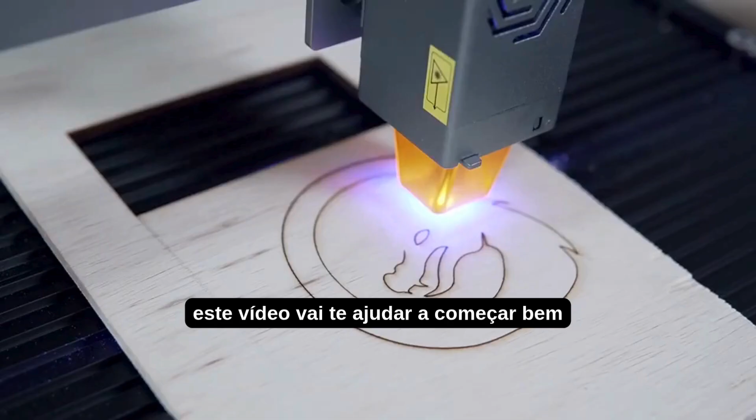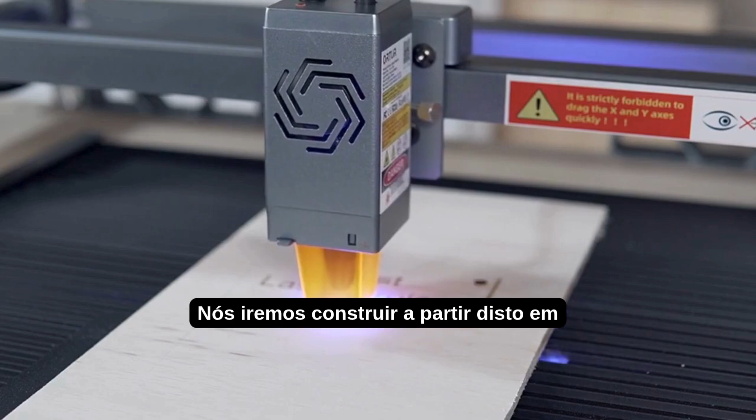For those starting out on their laser journey, this video will get you off on the right foot by giving you a high-level overview of LightBurn and the tools available to you. From setting up your USB-connected laser, using a few common tools, and finally cutting out a keychain as your first project. We will be building off of this in future videos, and will also have links in the description for more info.

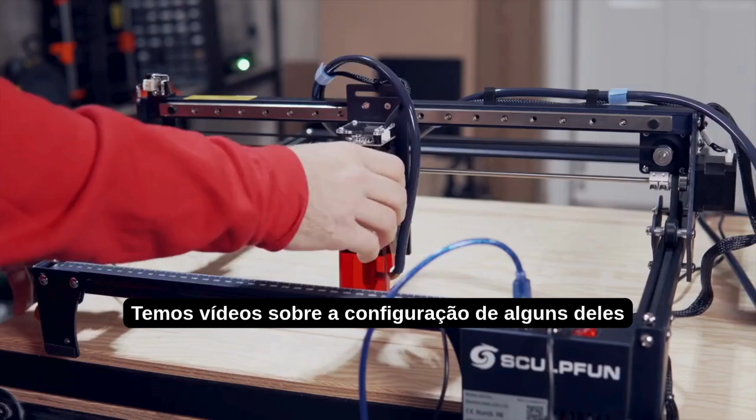The first time you open LightBurn, you will need to create a profile for your laser. Ensure that your laser is powered on and plugged into your computer over USB. Choose Find My Laser. This will scan for your connected machine and import settings from the laser. Many lasers will require a driver, so if your laser is not detected, you may need to get that from the manufacturer.

We have videos on the setup of some of these lasers in our playlist linked below. Enter a name for your laser, and if your machine has limit switches, enable Auto Home Laser on startup. Click Finish to finalize device creation, and OK to close out of the device window. In the laser window on the right side, we can see our laser status shows connected and the laser is ready.

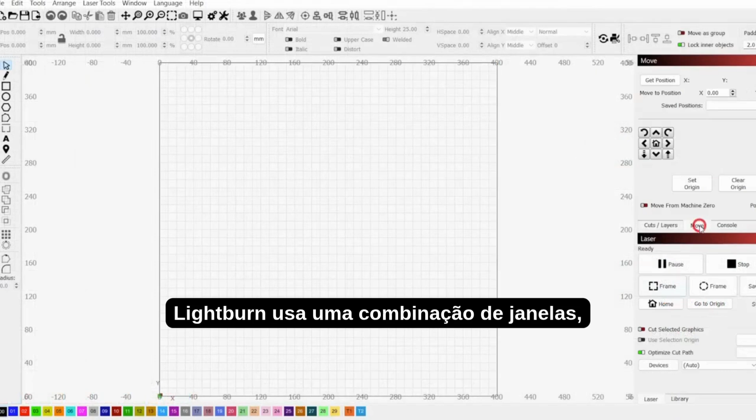LightBurn uses a combination of windows, tabs, and toolbars for its various tools and functions. Many of these can easily be moved or reordered to what works best for you. If something goes missing or you don't like a change you made, open the window menu and click Reset to Default Layout, and that will put everything back in its original place.

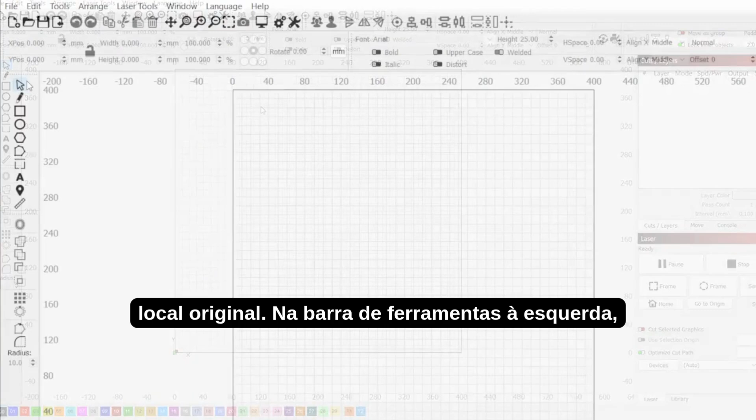In the left toolbar, we have a few tools that can be used to create shapes. For our keychain, select the rectangle tool, then click in your workspace and drag to create your first shape. With our rectangle placed, click the Escape key on your keyboard once to switch to the selection tool.

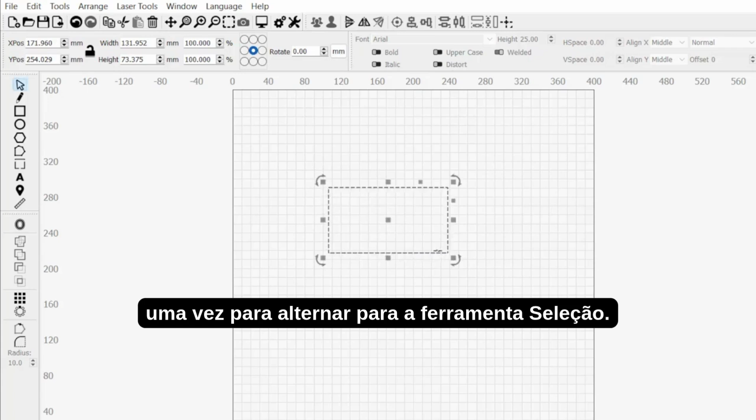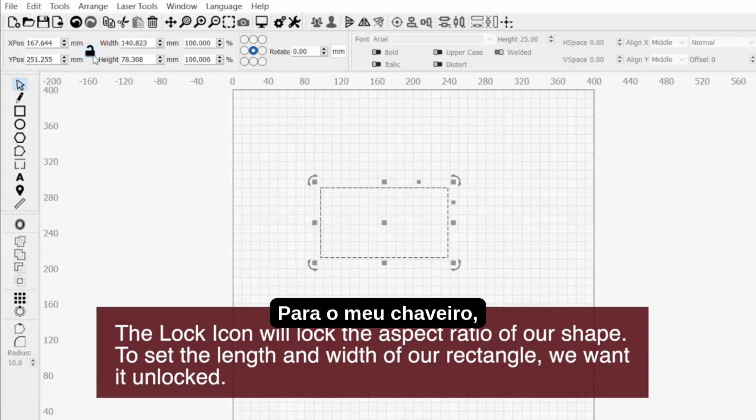With this, we can click and drag the handles around our shape to resize it, or click and drag the center handle to move the shape in our workspace. The width and height text box in the top toolbar will show the shape's current size, and you can set specific values from there as well. For my keychain, I went with a width of 100mm and a height of 50mm.

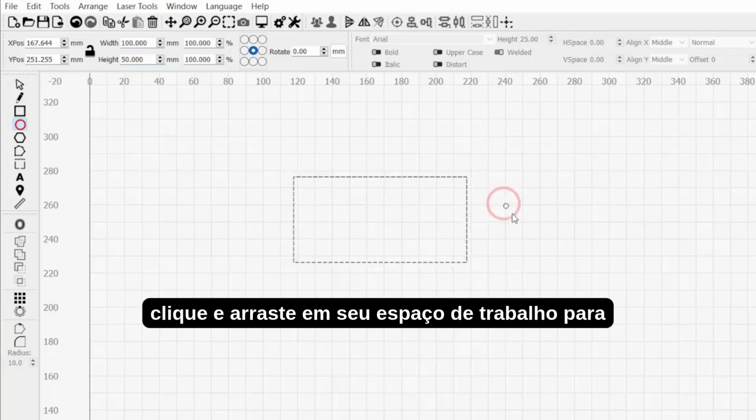Our keychain needs a hole for the keyring. For this, select the ellipse tool beneath the rectangle tool. While holding down the shift key, click and drag in your workspace to create a circle. Holding the shift key will ensure it is a perfect circle.

Just like with the rectangle, we can use the handles to resize our circle. 5mm in size should be plenty for most keyrings. Drag the circle to any of the corners of the rectangle, leaving a gap roughly the size of your circle from the edge.

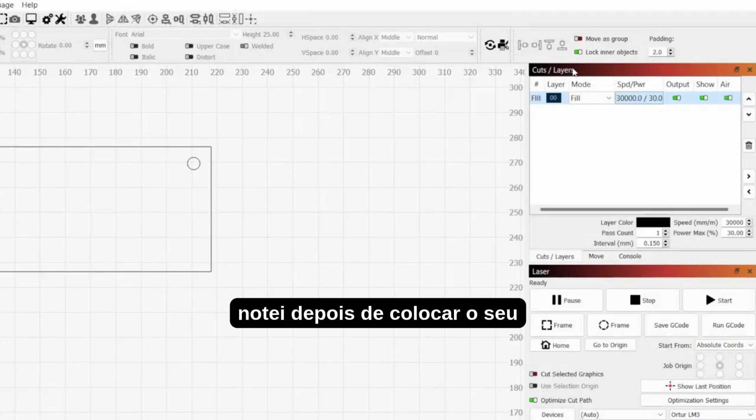You may have noticed after placing your rectangle that a layer appeared in the Cuts and Layers window. Any design created or placed in your workspace will have a color layer assigned to it that tells LightBurn what you would like done with that layer.

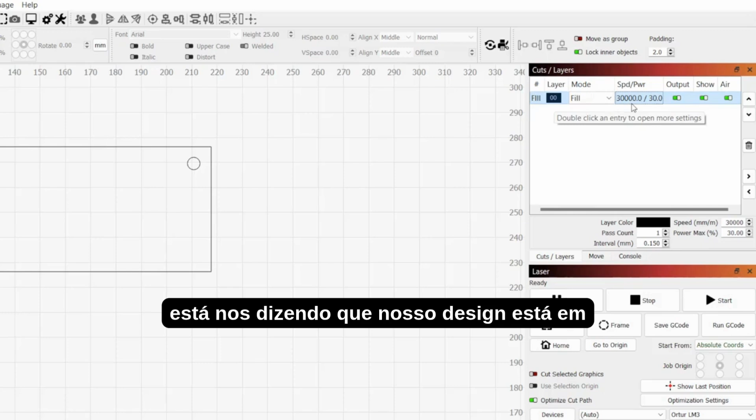Currently, it is telling us that our design is on the black color layer in fill mode with a speed of 30,000 millimeters per minute and a power of 30%. We can assign any color to our design using the color palette in the bottom toolbar. This will come in very handy for complex projects.

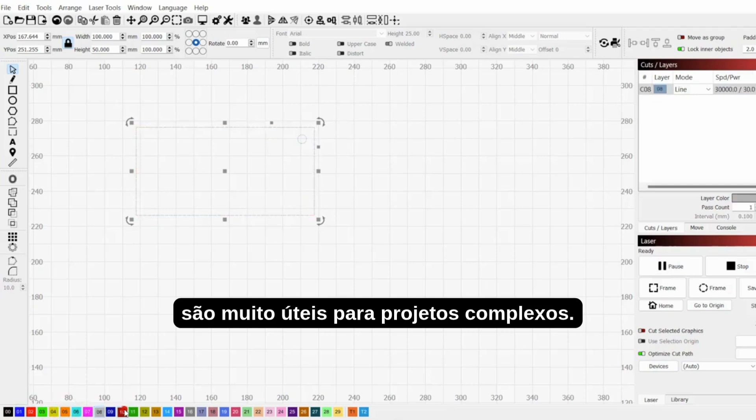Fill mode will completely fill in any closed shape on this layer. If we go up to the preview button in the top toolbar, we can see a simulation of the current settings.

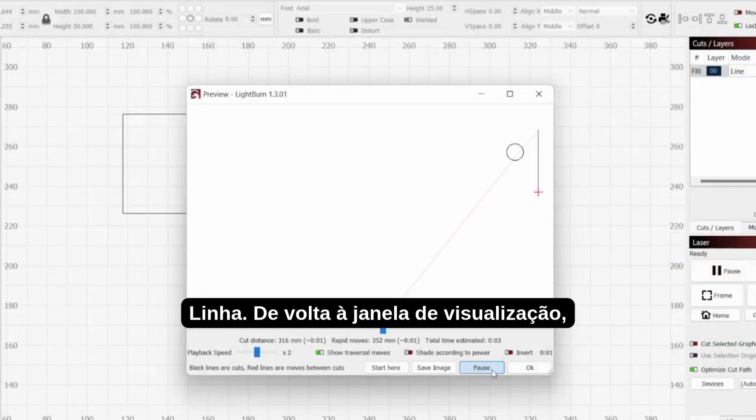We do not want our keychain filled in, and instead we want it cut out. To change this, click on the mode dropdown and select line. Back in the preview window, we can see that our rectangle and circle are outlined, which is exactly what we want.

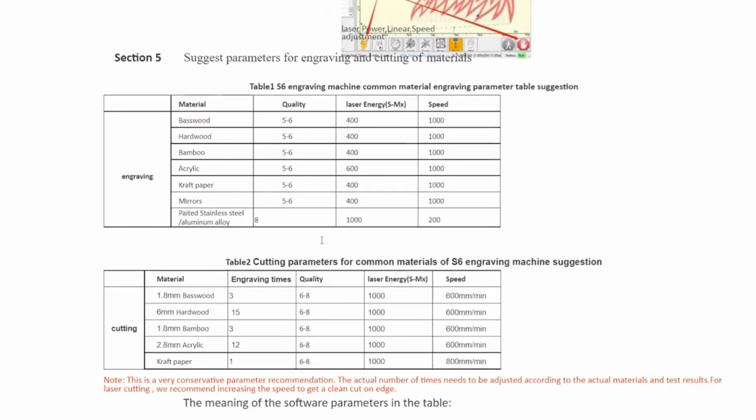As for the speed and power, this will be unique to each laser and the material you are using. Many manufacturers will provide a table of recommended settings, which is a great place to start. In later videos, we will show you how to use LightBurn's test tools to help find the best settings for your projects.

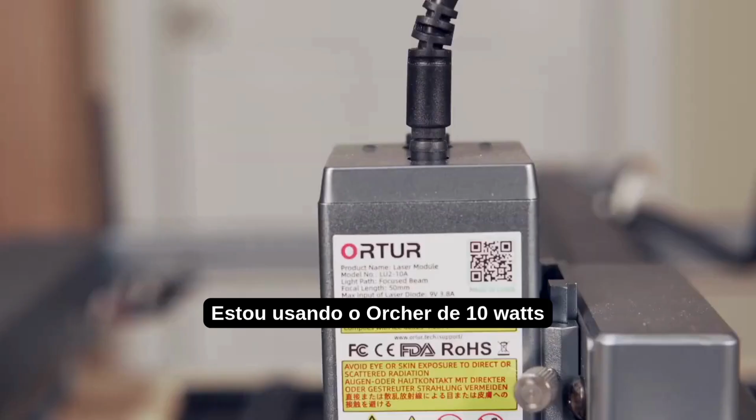I am using the 10-watt Ortur Laser Master 3 diode laser with 5mm thick wood, and a speed of 300mm per minute with a power of 100% is recommended. We can change the speed and power settings using the quick settings boxes in the bottom of the cuts and layers window.

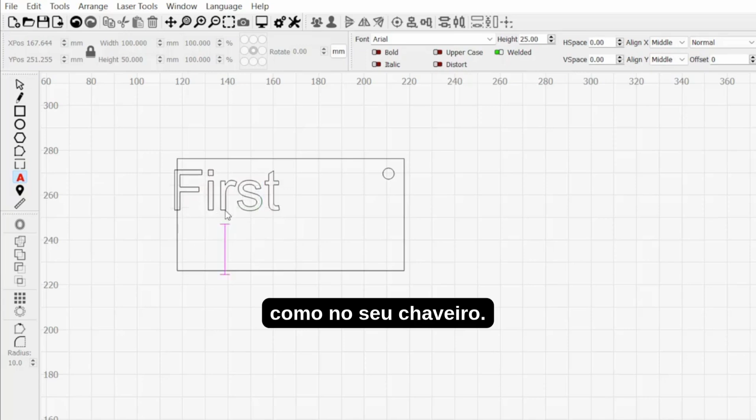All that our keychain is missing is some text. Click on the A icon in the left toolbar to activate the text tool and click in the keychain to place the text cursor. Here you can type anything you would like on your keychain. I went with First Laser Project, but feel free to be as creative as you would like.

The top toolbar will give you lots of options to customize the font, size, and spacing of your text. The main consideration is that the text fits inside of the rectangle. Currently, our text is on the same layer as our keychain body, meaning it will be cut out, but we want the text to be engraved.

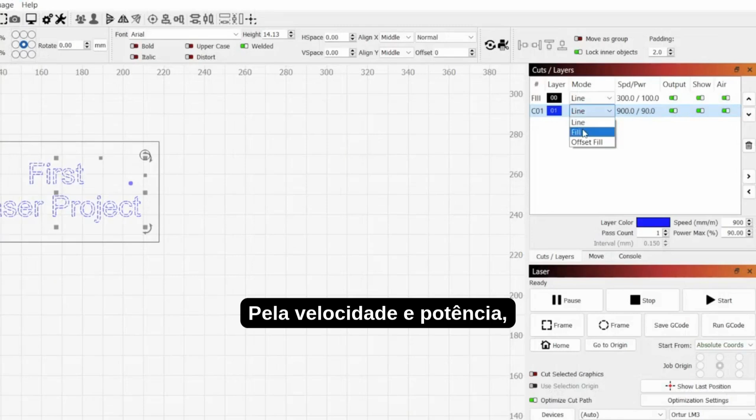With the text selected, pick any other color in the color palette to assign the text to that layer. For our text, we will change the mode to fill. For the speed and power, Ortur recommends 15,000mm per minute and a power of 100% for basswood engraving, so I will start there.

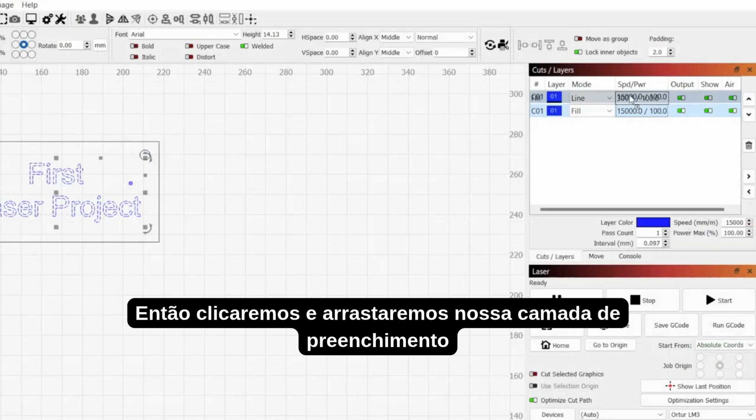The default settings in LightBurn will run each layer in the cuts and layers window from top to bottom. Generally, you want the outermost cut to be last to prevent your parts from shifting around. So we will click and drag our fill layer on top of our cut layer. Back in the preview window, we see our text is engraved first, followed by our keychain being cut out, which is perfect.

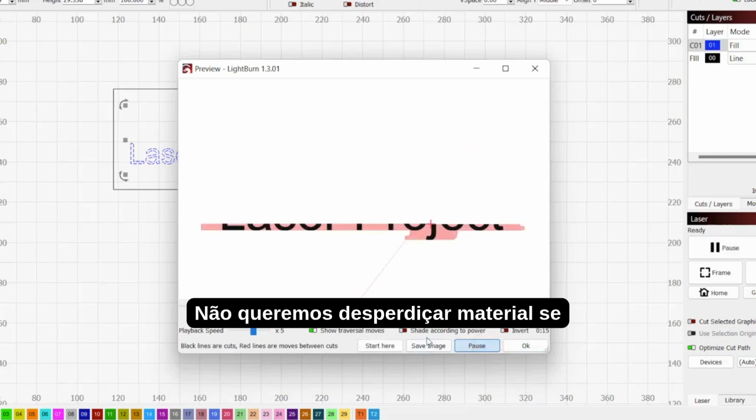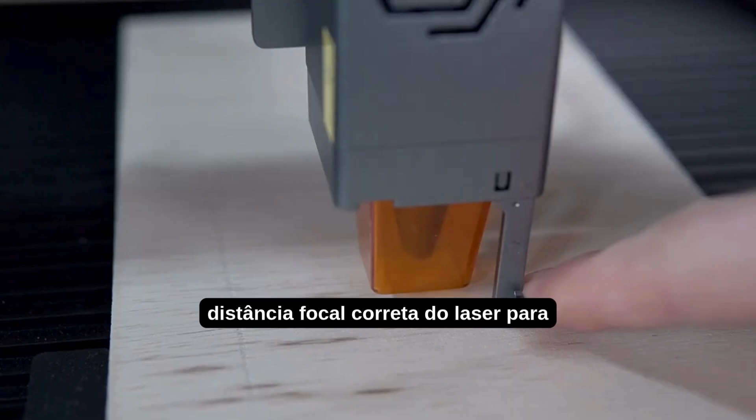You should always check the preview window before running a job to make sure that the expected output matches what you are seeing. We don't want to be wasting material if we can avoid it. On the laser, place your material down and set the correct focal distance from the laser to the top of your material. In LightBurn, we will be using the absolute coordinates mode for this project.

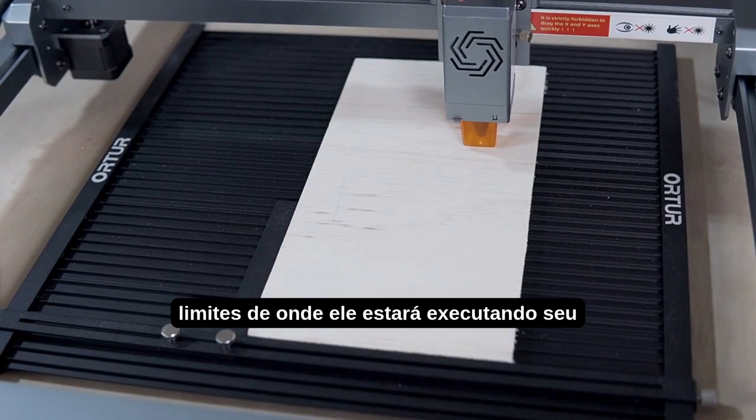Click on the frame button in the laser window to have the laser travel the bounds of where it will be running your keychain job. Once you verify that the material is underneath the laser for the entire framing, click Start to begin running the job. The entire job should be no more than a couple of minutes, and if all goes well, you will have successfully engraved and cut out a keychain.

If the material did not cut through completely, or the engraving is too light or too dark, you can adjust the speed and power settings, then rerun the job until you're happy with the results. This is a big first step in your laser journey. You should now have a general understanding of the workflow in LightBurn. We will be covering the topics outlined in this video.